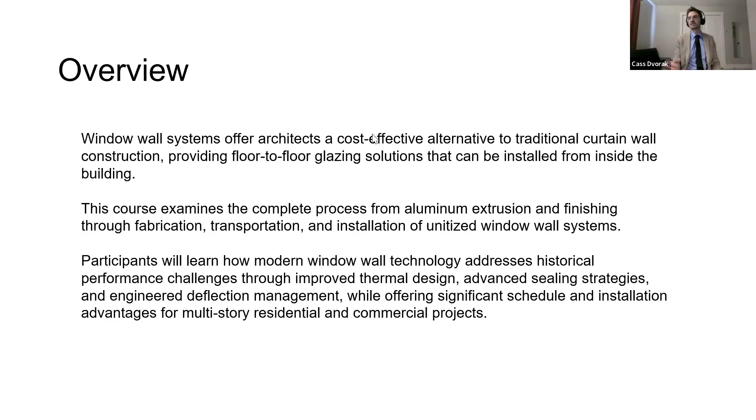In the course, we're going to complete the process. We're going to look at the beginning of the extrusion process right from the start. We're going to look at how it's fabricated, how it's manufactured, all the different processes, finishing options. And then we're going to look at delivery to site and installation instructions, and just generally speaking, giving you guys a nice general knowledge base on modern window wall systems so that you understand what these systems should bring to the table when they're presented to you guys. So let's have a look at that.

These are the learning objectives for today. So right off the bat here, compare installation methods and benefits. We're going to allow Jason to do that when we get to that part of the presentation, but we feel that's very advantageous to the group here to see basically what the options are in terms of how these are going to get installed onto the slabs. We're going to look at how the systems manage water, how it relates to some of the other modern facade systems, and how that is achieved in these systems.

Structural deflection accommodation methods: window wall in the past, and we will get into this later, has been problematic because of deflection accommodation traditionally. So there's been a number of advancements in this area as well that have really allowed these problems to not really be a mainstay of the systems themselves.

And finally, we're going to analyze thermal performance strategies. We're going to look at what drives those thermal performances, how our window walls and some of the other window walls in the modern sense are going to be reacting, and how they can start really comparing to curtain wall and the high-end aluminum systems that are out there that you are likely used to designing with.

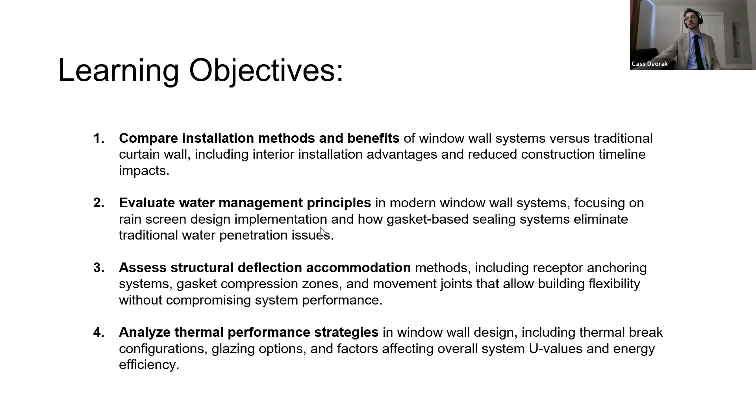Just a little roadmap here so you guys understand where we're going in the next 45 minutes or so. We're going to look at a very easy definition of what is window wall. We find, Jason and I, when we present, one of the first things that everybody wants to know right off the bat, and when I'm dealing with architects, is they're not even sure what window wall is, like what actually separates it from curtain wall. So we're going to look at that. Again, we're going to look at procuring, handling, fabrication, installation. We're going to go through all the phases of the product itself, how it deals with deflection, water performance, advantages,

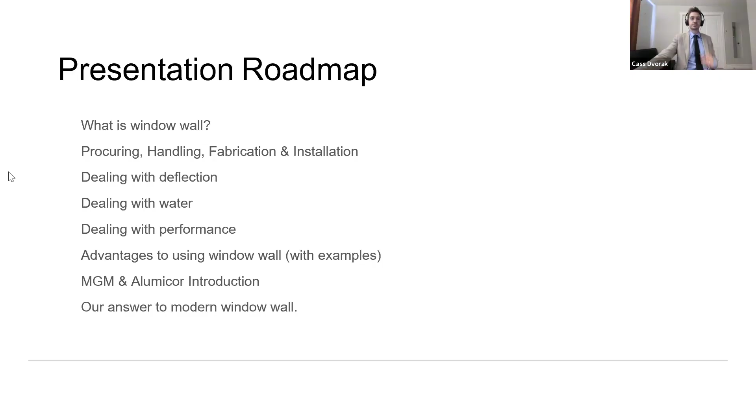So just one moment. Excuse me.

Okay, so right off the bat here, what is window wall? So the best way to define window wall, and I did go to all of the leaders in my own company here, the best way to define window wall is a slab-to-slab application that sits inside the building. So that is the big difference from curtain wall. Typically, curtain wall will sit on the outside of the facade, and window wall is going to go from the top of the slab to the bottom of the slab and sit on the inside, and usually span for most of that level of the building.

And why are we going to use it? Why is it coming up all the time? Why are there groups that are wanting to use window wall? Well, the reduced sound transmission between the floors is really one of the biggest selling points. Because the aluminum's not moving past the floors, there's not going to be any sound transmission like there would be with a curtain wall that would move past the slab. The sound's going to stop at the slab. That's a big selling feature for mixed designs, residential, and what have you, where residents might be worried about that.

It's installed from the inside of the building. So just briefly, in our region, and our regions may be a bit specific, but we were just granted the ability to go up another 10 stories in the city for building permits. So obviously every building is now being redesigned to go up further. And this benefits people that are using window wall, as the cost of equipment and the difficulty and complexity of the job as you're on the outside of the building obviously get worse as it goes up. So being able to stay on the inside of the building is a huge advantage, not only for simplicity, but also cost savings.

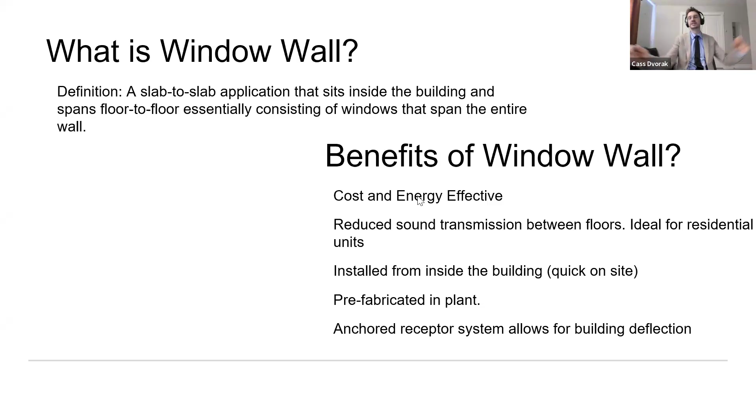So on a project basis, when you're trying to relate cost savings, it's usually cost versus performance, right? We feel that the modern window wall systems have found a way to harmonize those two ideas in a really positive way.

So let's start here, right at the start. This is what it's going to look like before it looks like anything else. It's going to start as an aluminum log. It's going to get cut down into shorter billets. All these pictures have been taken from our facilities in the United States, but just to give you an idea, if you haven't seen the process, on the left side here we have the dies.

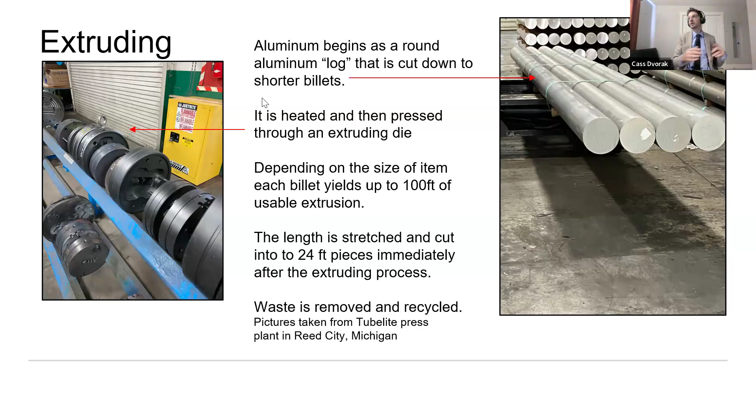These billets are going to get heated up to extreme heats. They're going to get pushed through the die. They're going to come out to about 100 feet, depending on the complexity and the size of the die. And that's essentially where they're going to start. And then from there, typically they'll be sent over to a finishing facility.

This is an anodizing facility specifically, but window wall is typically able to be painted and powder coated, whatever is needed. But typically we see anodizing, right, Jay? Typically anodizing. Yeah. So this is just a brief look at the anodizing process here. It's a naturally occurring electrochemical process. They have to be scrubbed and rinsed in an acid bath.

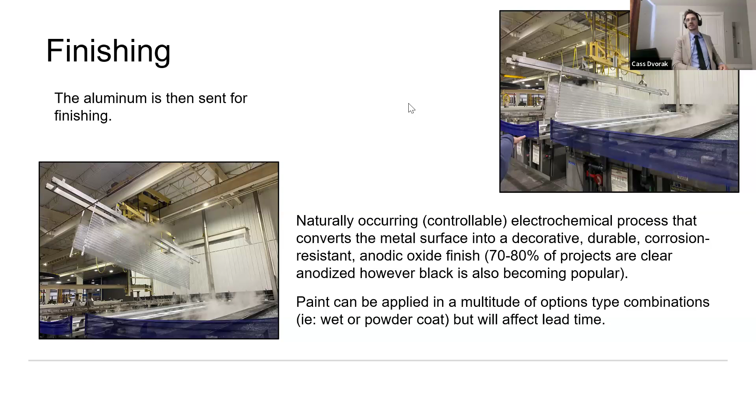And again, we actually have another presentation all about this, so I borrowed some of the slides from it to explain some of this stuff. But the decorative, durable, corrosion resistant feature is very ideal, especially for us since we're on the coast. But really, anywhere you go, anodized still seems to be the main finishing solution for window wall.

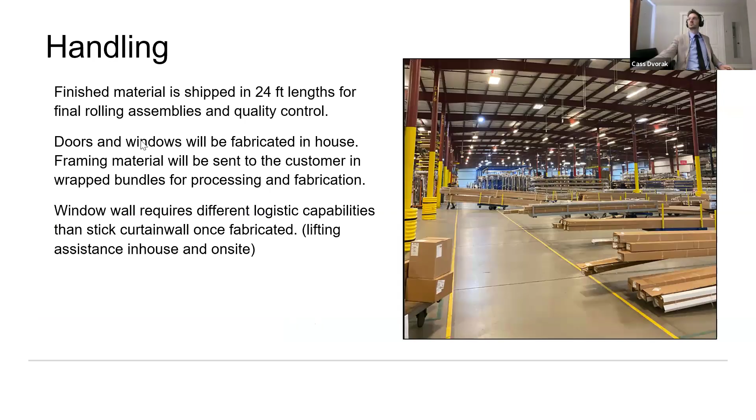Then it's going to get into handling. We've got to send it around to different facilities. They're going to package them up nicely so they don't get scratched, and send it off. And this is where it starts getting a little bit different than curtain wall as it hits the facilities.

These pictures were taken from inside MGM's plant, but typically you're hitting a manufacturing line now. And as you can see, these units are going to be pre-glazed in-house. And that is a big difference. Some unitized systems will be pre-glazed in-house, but that's a big difference that drives the window wall systems. And that presents a couple different opportunities for whoever's working with it to find some solutions.

And essentially the difference is you have to find room for curing and storage; those are the big differences. So once they're glazed, they need to be set aside, untouched for, what is it, Jay, about 2 to 4 days, depending on the type of caulking you're using. Yep. So they're going to be set aside.

And not just that, but for anybody who's ever picked up a frame with glass in it, being pre-glazed, they've probably become about 400 to 800 pounds, depending on the module size, which requires its own new type of logistical handling. Again, different from curtain wall that way. I'm trying to show the differences of window wall and curtain wall, because that seems to be where most people get confused.

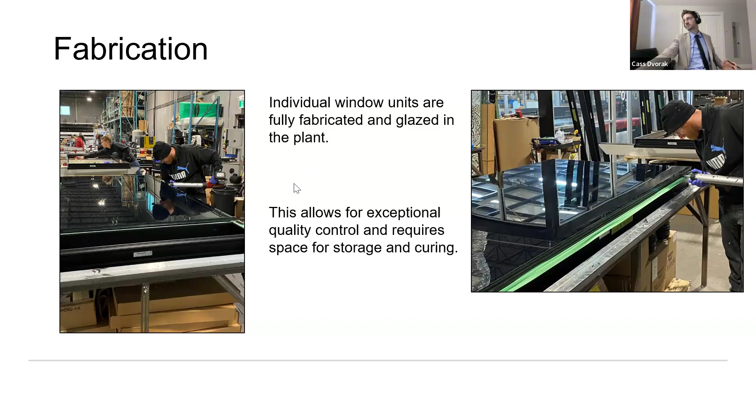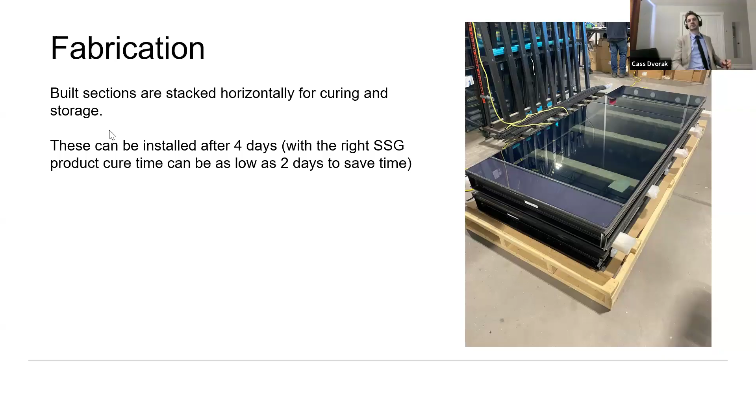So these are going to be a completely pre-glazed and prefabricated module before it goes to site, as you can see here on the tables. They're going to be stacked horizontally, they need to be horizontal, and they're going to cure for a few days. Again, if you use the right SSG product, you can speed that time up and really speed yourself up on site, depending on the requirements. That can be discussed with the contractor for any modern window wall system.

And transportation has to be considered. It is a bit different of a site schedule for this. Typically with a curtain wall system, a lot of it's going to be prepped in the shop and sent to site to be pieced together on site. What you're seeing now with window wall is fully fabricated modules being brought to site.

This is a local site where we installed a version of our modern window wall as well. It's going to show up on a skid. The GCs and site project managers are going to have ways to quickly put these up on the stories. But essentially, the window wall installation is going to follow the building construction vertically, and you can go up before they're done the building.

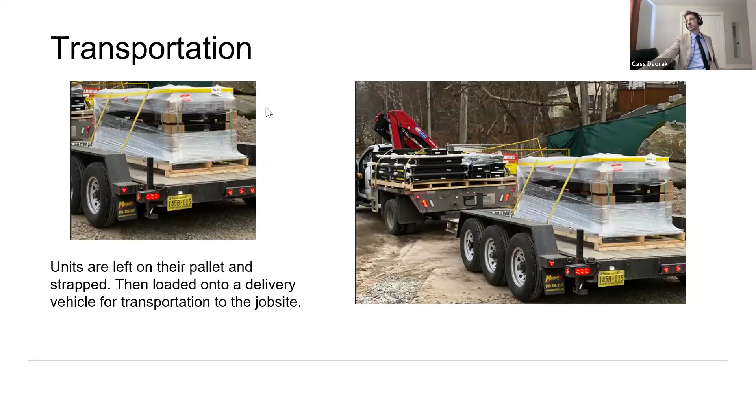So usually it's just a quick coordination with other trades on site to get your product up on top. But once it's there, it's a very quick installation, and that is really where we start seeing advantages to the window wall. Just a quick shot of a telehandler bringing up, and next, that's a floor of window wall modules right there. Probably 2,000 pounds. So again, there's a couple considerations that need to be taken, but once you're in gear, I would say an entire floor could be installed in a day.

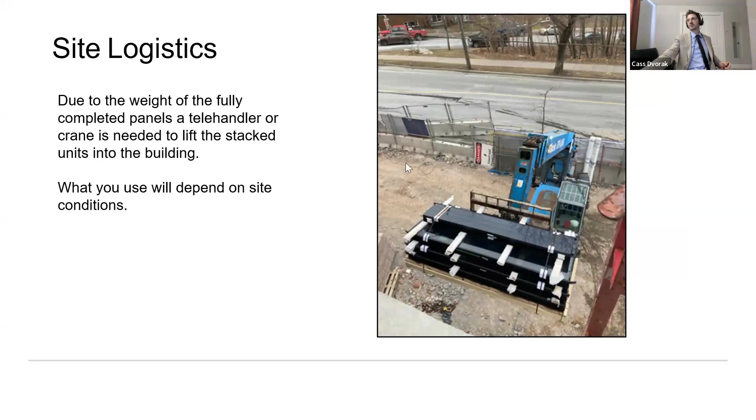Correct me if I'm wrong there, Jason. Yeah, depending on the complexity of the job. Yeah, right on. So I'm going to pass it over to Jason for this. This was one of MGM's sites that we visited frequently and worked very closely together with, and he's going to explain installing the receptors, and then we are going to move on to the slide, but he's going to start with this one. Go ahead, Jay.

Yeah, so what you're seeing here is a receptor system, a sill receptor being installed on top of a curb. We have a curb in this application because there's a patio frame and they had to pour a concrete curb. So we're running along a whole curb, but there's a lot of times where you can be right on the very edge of the slab and you can mount right down to the slab. But the main key point on this is to make sure when you're laying this receptor down that you have all your beds of caulking laid in place and everything's sealed.

It then gets bolted down into the curb, whether it's concrete or wood, whatever your substrate is. You seal off all your penetrations, all your miters and all that stuff. It's like a silicone sealant, like a roll of silicone sheet that you lay down. You lay silicone over top of that. So that's your critical component right there for keeping water out of it. And so you just fully seal that whole receptor frame. And then all your modules just go into it and they stack.

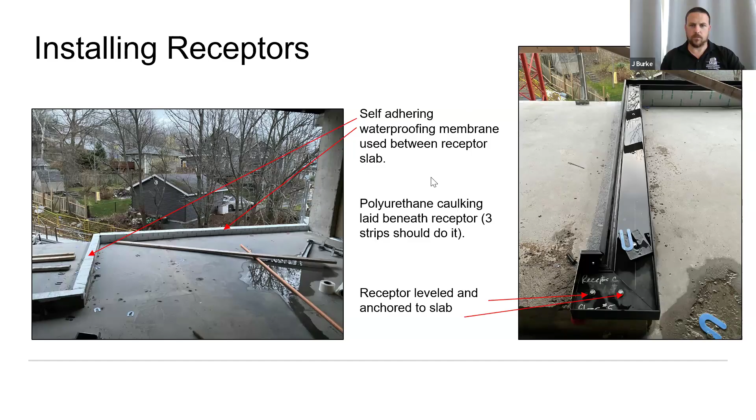Side by side, correct? Correct, yeah, in a linear fashion. Yeah, so essentially the modules just get entered in and then tipped up. I think we have a slide that shows that, so we'll get into it. Next slide is good, Jay? Yep. All right. I am going to let you explain this one as well, because this is definitely more in your wheelhouse. So there's several different anchoring types that you can do.

This one here shows a strap anchor. So there's a groove inside of the head and sill receptor that you can preload all your receptor frames with. And you can bolt that right into the concrete from the outside, so you don't have penetrations right in your sill pan. And then you can space those out as per the engineer specification. So you can put 2 per foot, 4 per foot, or you can just go 1 per foot, however the engineer decides. And then there's 2 other applications you can mount them with. But this one here just shows you the strap anchor and how it goes.

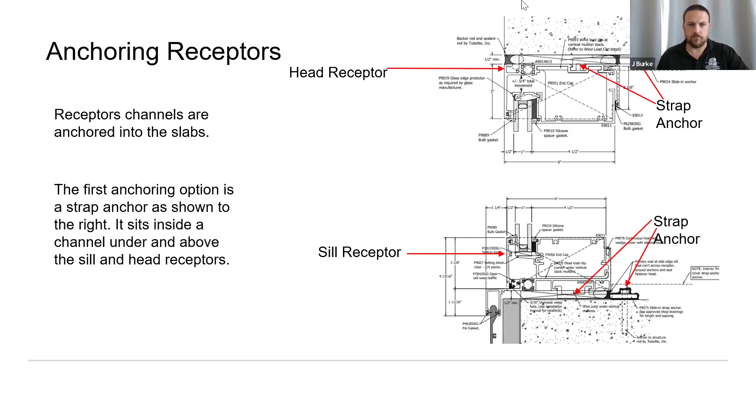Yeah, and we'll look at those other applications. I'd say the strap anchor is probably one of the more common on a bigger job, because even when we're talking about managing deflection, the strap anchor can take some of that deflection as well, maybe if it's side to side. But let's look at the next one. Yeah, horizontal fashion.

So Jason, this is the channel receptor, or the channel. Yeah, you basically have the same thing here, but it's a channel receptor, so that gets mounted down on the concrete slab, and then your sill receptor straddles right over top of that. Then you have no penetrations in your sill there either. And obviously just a simple through bolt anchoring at the bottom for a smaller application if you're not as worried about building deflection. Correct. If you have a concrete slab that's not quite even all the way through, that's typically your best bet, because then you can shim accordingly as you go.

Excellent. And again, as you guys see, the channel anchor here. I'm not sure if you can see my mouse moving on the screen, can you? Yeah. Excellent. So the channel anchor here just fits into the slot, and that can handle a little bit of up and down deflection, and even side to side with it sitting in the channel. There's no break on that going horizontally.

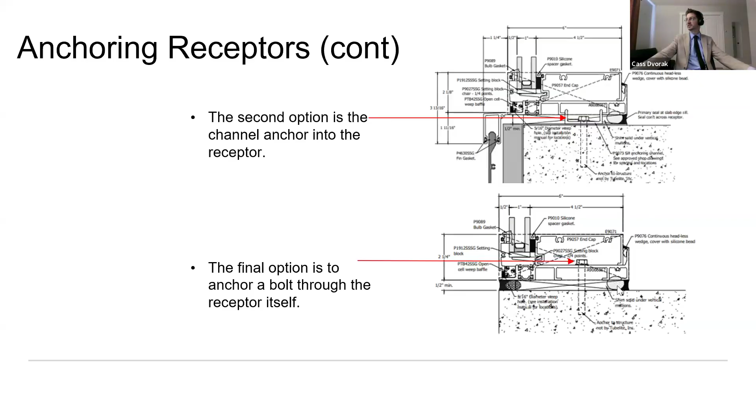So installation here again, just as you can see here, I'm going to let Jason get into this, but I'm just going to explain the picture that we're showing here. So really the most important thing to understand is that you're going to have a head and a sill receptor, as you can see there. The sill receptor on the bottom and the head receptor.

And then what's going to happen is once that channel is laid, the modules are just going to stack in, and they're going to put into the bottom and then lean up. And that's basically what we're explaining here. And then as they're leaned up, there's a drive-on head receptor here. It's just got these shark teeth, and you hammer it in, and that holds everything together after it's set in. So it really allows you to get that strip window feel, but essentially slab to slab, right? Anything to add to that, Jason?

Yeah, and so then you can preload your head receptors as well with the wind load clips. So they're inside of the receptor. Cass, you might be able to put your mouse on it to show. Yep. Yeah. The right wind load clips, the larger, bulkier one towards the back, right above the screw chases. Yeah, so there's a big block there. It's a big aluminum milled out block, and they can get preloaded into your head receptor too.

So again, requirements on the engineering side of things. If you're faced with strong wind loads, a lot of movement, we can preload those. And so basically you have 2 window wall sections, and they're open back module systems. So when you put your first piece in, you can slide one of those wind load clips into that receptor, into that section. And then when you go to put your next section in, slide it into it, it just locks everything all in. And so I think this is a feature. Oh, sorry, go on, Jay. My bad. Yeah, sorry. So that drive-on piece there would be no way that could back off.

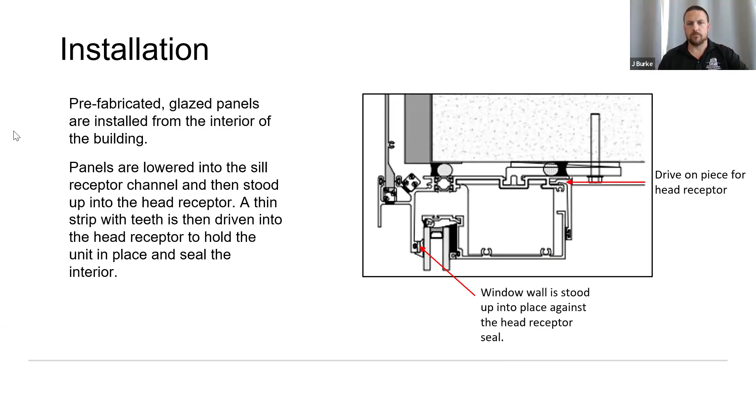Excellent. And yeah, this is what you should be looking for on a modern window wall system is the type of sealing like this, using a gasket built sealing, and we'll get again coming up to that and why that's so important. But to stay on the vein of installation here, what do we do at the slab edge? And that is a good question, and that is another thing that separates, I would say, window wall from a punched window system or a ribbon wall system, or a curtain wall for that matter.

What we're going to have here is a slab edge cover essentially, and this is part of the receptor. This is a rolled component part of the receptor, and it just comes down and hangs over the slab. And this is a part of the head receptor, so sill receptor, head receptor, from covering the slab. And then from there, what we do in-house is we have an option for just an aluminum slab cover essentially. But there are options to install ACM paneling, I believe, spandrel glass, as you can see in the example given here at MGM's job site.

And any modern window wall system is going to allow this, and it should be really allowing for any kind of filler product to be used over top of the slab. But that is how the slab is handled, as you can see here. Moving up, the spandrel glass is going to be installed, and then you're just going to move up on the frame. Anything to add to that, Jason? No. Okay, right on.

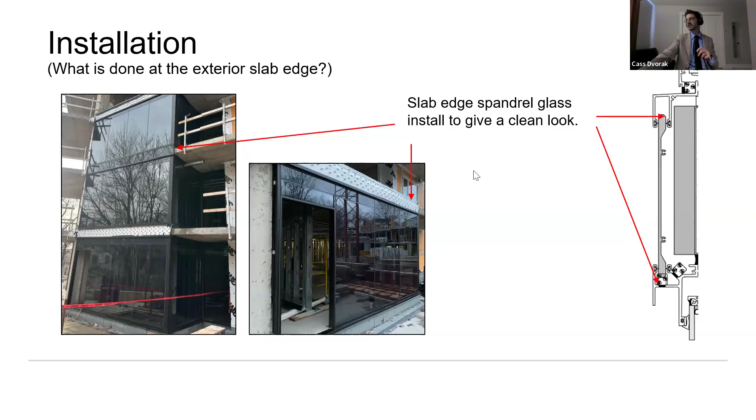So yeah, we're going to look at how these modern window wall systems are going to allow for deflection. Now, typically speaking, back in the day, when window wall first became a thing, the horror stories that I heard from it was that essentially they were only sealed using caulking, wet seal. And that obviously, especially on the larger buildings, as they move and deflect, and not even over a lot of time, that obviously caused leaks.

So what the modern systems have gone and done is essentially move to an entire gasketed system, so the system itself can move and adjust, and the gaskets can handle the movement without breaking the sealing and the caulking. As you can see here, we're just pointing to all of the gaskets that have been added to the system, where maybe traditionally they would have been a wet seal.

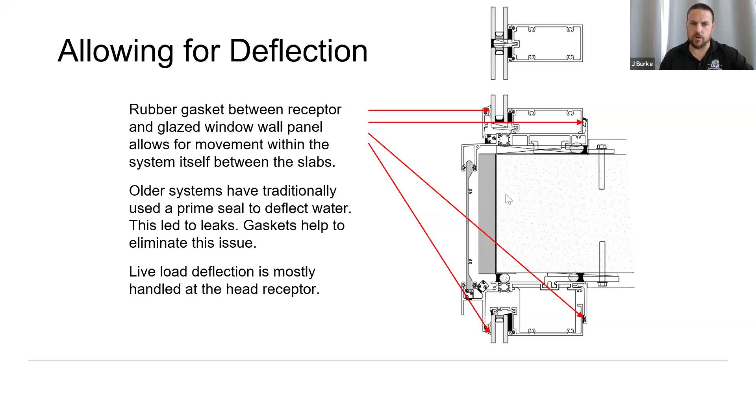However, live load deflection is mostly handled at the head receptor. That's where you're going to leave most of your tolerance for construction. As you can see in here, there's a lot of room left in this cavity. Anything to add to that, Jason? Yeah, they leave a 3/4 inch space between the top of your frame module and the inside of your receptor. So each floor has 3/4 of an inch of movement available there, either way. Along with whatever tolerance is granted in the anchoring system. Yeah, so your story creep and your concrete shrinkage over time should never exceed that amount. Excellent.

So that's vertical deflection, but horizontal deflection we've also had to take into account. So we're looking at our system here just as an example, which is an SSG system. But typically in the system, what we've done here is a vertical diverter gasket. So this is a very heavy duty proprietary gasket that sits between the modules, and it essentially acts almost as a curtain wall throat.

But as you can see, it can be used in a couple different applications there, and it can even be capped to mimic that look. But ideally speaking, this example is an SSG, and as you can see, that gasket is just a big, high quality rubber chunk. And as that system deflects horizontally, that vertical gasket is going to absorb that deflection between each module as well.

Jason, do you want to speak to this a little bit?

It's just talking about deflection being handled in the strap anchor system and in the channel system, going along with what we discussed earlier. Yeah, there's another point we can touch on with the details here. Your anchoring is going to be determined by how far your system has to stick out past your slab. The front bull nose of a floor slab has an insulation. You can see it's in the gray there. Typically, you see about a 1 inch thick insulation. So you want your window system to come out past that.

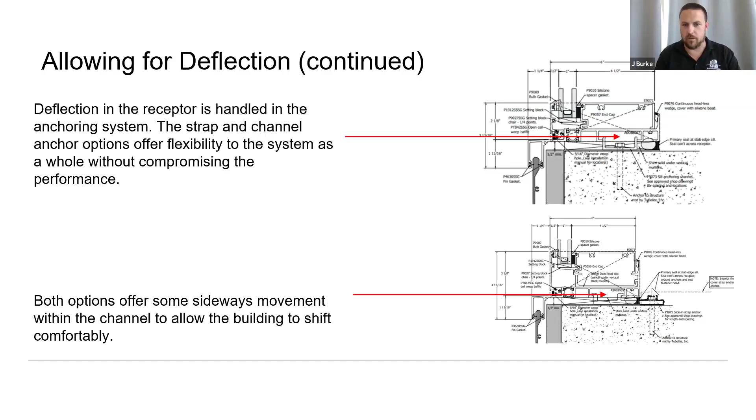So in terms of the deflection on it, as we alluded to earlier, that system can move in a linear fashion if it needs to over time. Thermal expansion and the movement of the building, it absorbs it vertically and horizontally. And that's such a great point to add, Jason, just in terms of, I think a typical modern window wall system is going to want to give you options on how it can be installed, how it can be mounted, because every project's different, right?

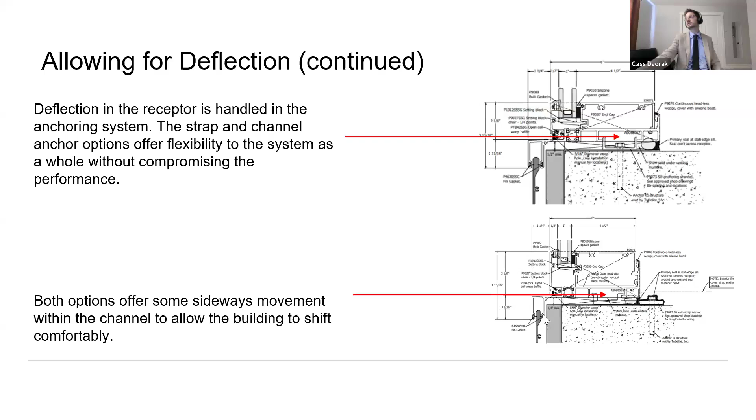We always have our standard details, but everybody in this presentation knows that every project's going to have an anomaly. It's always going to have a detail that doesn't make sense. And ideally speaking, I think a modern window wall system should allow designers the tools to get around these types of things. Yes. So we're going to look at one of the main advantages of this.

I touched on this earlier, but especially in the bigger markets with the taller buildings, this is an effective installation system because of what you're seeing in this picture. The building schedule allows the product to be installed following the installation of the vertical stories going upwards. Just one moment. Sorry.

And specifically for highly repetitive projects, this is where our window wall system is going to be your best friend. Something that can be repeated in-house. You can take advantage of the in-house quality, the in-house control. It's a good point that typical details and repeated details are always faster and easier to quality control when you're fabricating in-house. So with a system like this, the more typical details, the better, as really what you're doing is speeding up fabrication. And as it goes to site, it can just follow that building.

So it really does change the schedule of the building installation, it can speed it up, but the people on the project management team are going to have to be aware that this is the product being used, because it's going to require the glazing contractor to be on site at a different schedule, right, Jay?

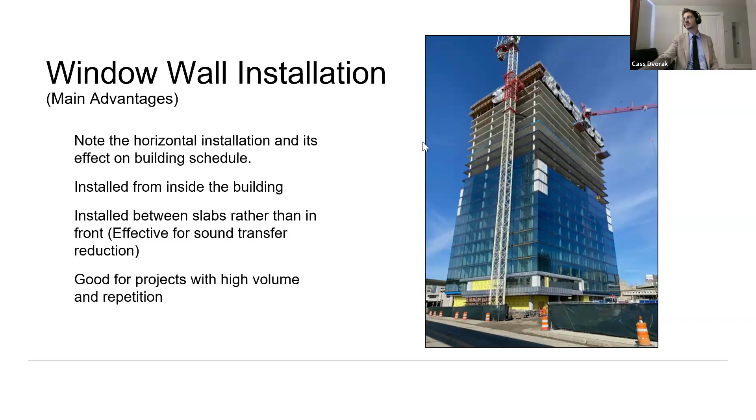It's very advantageous. Yes. So now we're going to look at how to keep the water out. That is the big question with window wall. These systems used to leak. Why don't they anymore? So essentially we touched on it with regards to the prime seals versus the gaskets. Old systems only relied on prime seals, so that is really primarily where you saw the leaks. But how do you implement a gasket system that actually stops the leaks? And we're going to look at that.

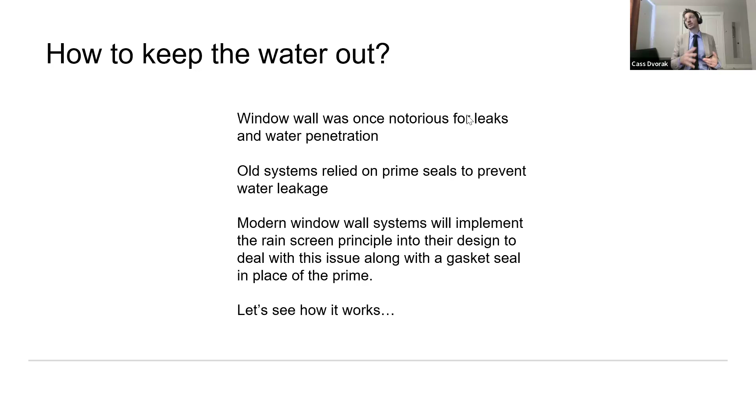But really what you want to do is implement the rain screen principle. It's a rain screen design that's going to be present on any high-end curtain wall system, on any high-end ribbon window system. Really, any high-end building facade system in 2025 should have a rain screen system that's built in. Essentially, it's the idea that you keep a cavity between the outside and the inside of the building with an internal seal separating the pressure, and then the pressure in the cavity will match the outside pressure.

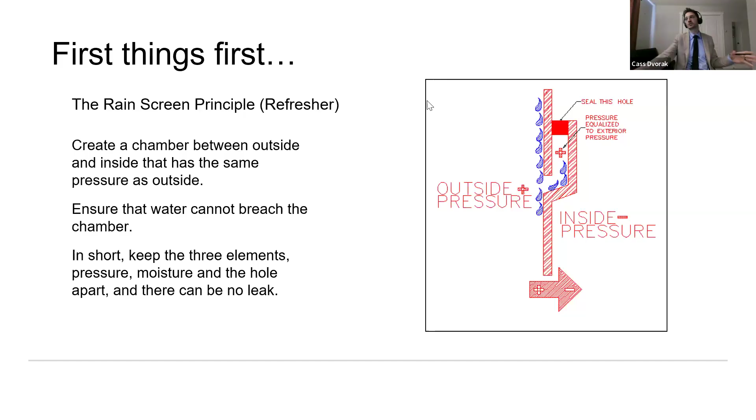So any water that manages to get into a window wall system should effectively be wept out the bottom, and we'll show you what that looks like. It is the same principle as a curtain wall weeping system. As you see here, the pressure cavity remains, the seal is on the inside, nothing's going to get through. Water is always going to work its way into this area of the system, but it's just going to wind up here and filter out the weep hole. This is a weeping cell baffle, just to make sure debris doesn't get into that hole and plug it up. And you see the same thing going on at the bottom here.

Anything to add to this, Jay? And also here at the slab. No, I think it's pretty good. If anything behind your slab edge cover, it also weeps out through the top of the head receptor as well. Yeah. So I think the issue of water penetration has largely been solved in modern curtain wall systems, and in the last 5-10 years it has been solved in modern window wall systems as well. And this is how. It's essentially the same idea, just implementing the same principles with a slightly different build system, right?

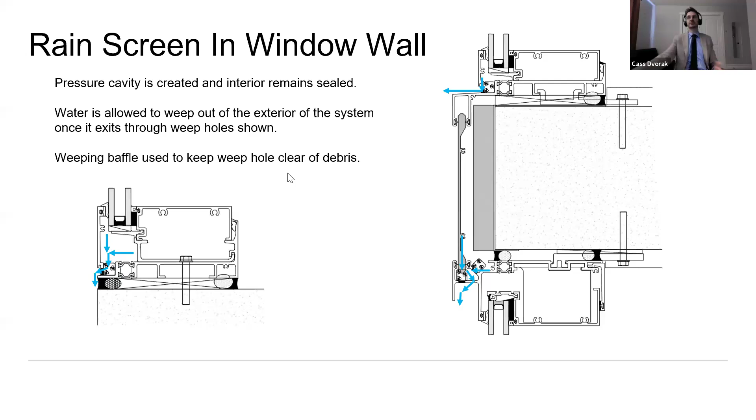Right. Then we'll look at thermal performance. This is becoming really important in Canada. Our building codes just changed, I think, 3 months ago. And we've actually been dealing with this with window wall already, in a positive way. People are now looking for high performance thermal systems. The old systems primarily used even 30 years ago, especially in certain markets in Canada, I wouldn't say they're getting phased out, but they're becoming more strict on how they're allowed to be used. The system itself is usually as good as its infill, but it still needs to have a tight rating.

If a window wall system isn't hitting the same thermal performance standards as a high-end curtain wall system, I would say that any market, at least north of the American border, is going to be tough. So these are important things for people like Jason and I, because we have to deal with this all the time. So what are the factors that are going to affect that?

On commercial buildings, it's largely what's happening inside the building, so that's got to be looked at. Is it residents? Are there going to be people cooking inside? Are there machines operating inside? What's going on inside this building needs to be considered and, depending on the size of the project, given to one of our engineers or an engineer, so that can be worked out and make sure that there's no issues.

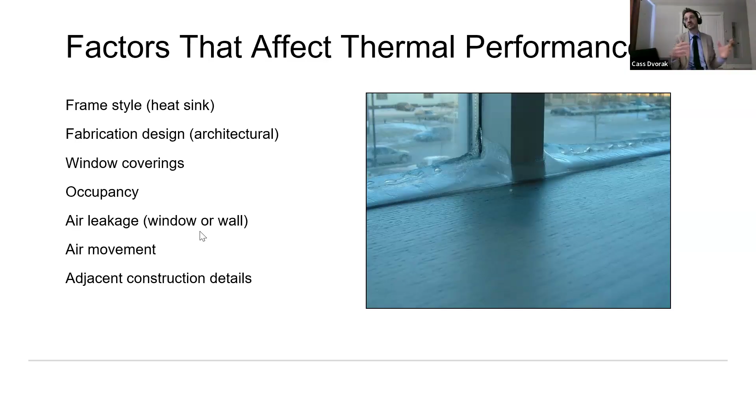Adjacent construction details. If there's another type of product being used in the project, all of that needs to be considered. But modern window wall systems should be able to integrate new products. That is another extremely important feature of these systems. So let's look at how these new systems are performing. A modern window wall system should be performing with a double glazed application up to about 0.3.

That is about where the most strict Canadian construction codes are putting thermal performance, and that keeps designers away from having to design with a triple glaze in mind, because on a 40, 50, 60 story building, the costs on a triple glazed building can become exorbitant. So what you're trying to do is still hit all of the thermal benchmarks you need to hit while keeping costs under control. And this is how we do it.

And it's essentially a very similar way to how we do it with curtain wall. This is how it should be done, a strutted thermal break, polyamide thermal break. I think there are still a few systems out there that are pour and debridge thermal break. There are probably a few systems out there that aren't thermally broken, or with a very old foam receptor thermal break, similar to some of the old curtain wall systems. But ideally speaking, the thermal break is going to be in the receptor system.

So this receptor base is two pieces, and they're rolled together using these polyamide strutted thermal breaks. And a polyamide strutted thermal break is really what all of the high-end facade systems are using. You can get a little bit crazier and go with fiberglass or something like that, but that's not necessary yet in any of these climates. But really to hit these building code standards, typically speaking, you're going to need a dual strutted thermal barrier at the very least to meet thermal codes.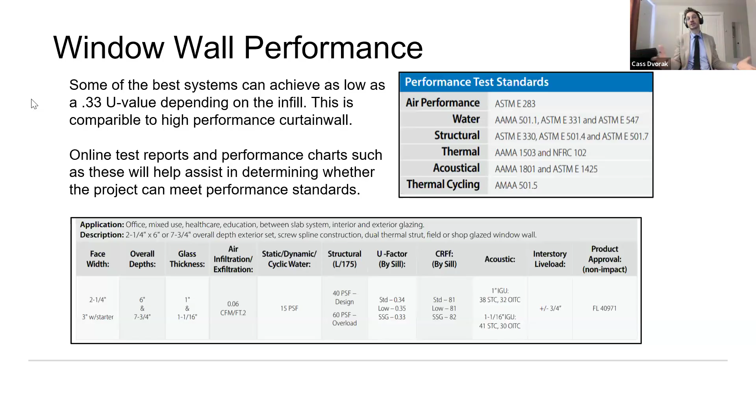But yeah, looking at the advantages of the newer systems that are coming out, the biggest advantage that we found that people react to the best are the cost savings. And where you're going to see the cost savings aren't necessarily on the material. The owner of the building is going to see the cost savings on the ability to install from the inside of the structure. They're going to see the cost savings as the building becomes larger, and when the design is kept to a repetitive design. So these are all factors when designing with window wall that should be taken into consideration.

I think it's a natural reaction to want to get very design centered. But if there are ways in the design stage to save potentially millions of dollars, which some of these could, then I'd say these window wall systems actually offer potentially more solutions for the issues that you're running into more and more these days.

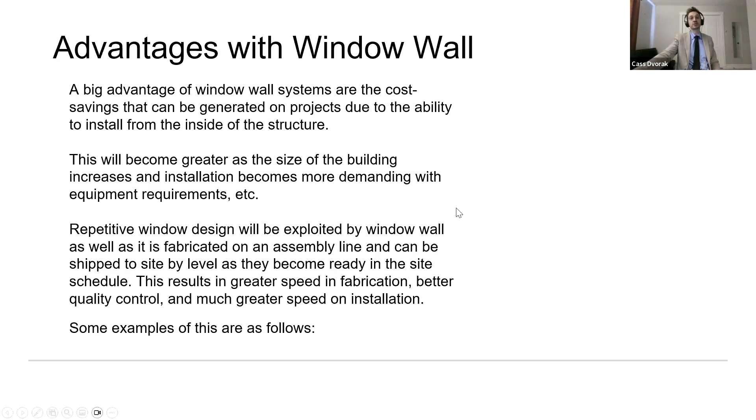2025, I know in our region, we're running into labor problems in the city. We're running into difficulty finding large crews. And this is a very friendly system for that because of these reasons. They're quick on site. They're installed from the inside of the building. And most of your work is being done in-house in a controlled environment. You don't need a large crew to do this type of thing. So these systems are getting much better and much more advantageous for groups to work with and less risky. That's probably the most important part, they are performing and behaving much more like a robust curtain wall system now.

So that does conclude the educational portion of the presentation. Keep your questions just for one more second. I am going to get into the final part of this and just give you guys an idea of who we are, and we'll keep it brief, don't worry. And then you guys can pick our brains and ask us as many technical questions as you'd like.

So I just want to make a brief introduction of the partnership between MGM and Alumicor. We've been partners for a few years here in Halifax now. Once upon a time, Alumicor had a plant here, and we don't anymore. And MGM then built a plant and took over distribution. Jason actually used to work for Alumicor and Tubelite once upon a time. So that's why he's so knowledgeable about our systems. And we worked together actually at the time. So it is a symbiotic relationship.

And what we've tried to do as a group and as a partnership is offer to our customers, but more importantly to you guys, to the design community, the access to MGM and Alumicor's and Tubelite's engineering and design resources. That is where MGM and Alumicor have put most of their resources, I think, and they've put a heavy emphasis on assisting the design community. And I think that's what sets Alumicor as a supplier apart from the other suppliers in Canada and Tubelite in the United States, is their dedication to the engineering side.

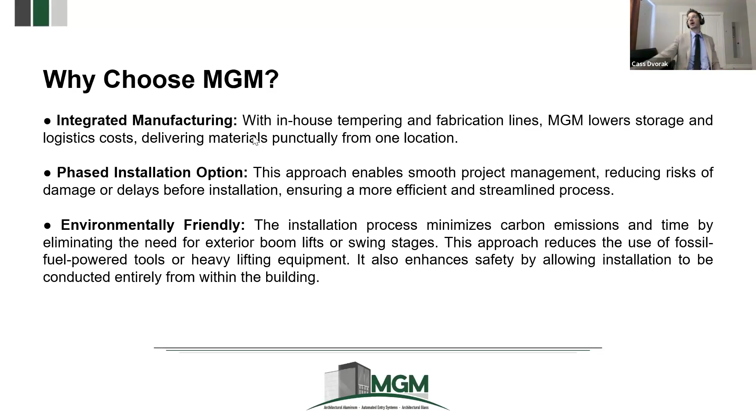Just to give you a brief glimpse of what we were showing you, kind of examples of this in the presentation. This is Alumicor and MGM's, I would say, answer to North America's need for high-end performance window wall systems. Said it earlier, that Tubelite 950 SG window wall system. It's a newer system. I think it's about 5 years old, and it just came to Canada about a year or two years ago with MGM. They've done a few projects with it now, and it's been fantastic. It is an excellent product.

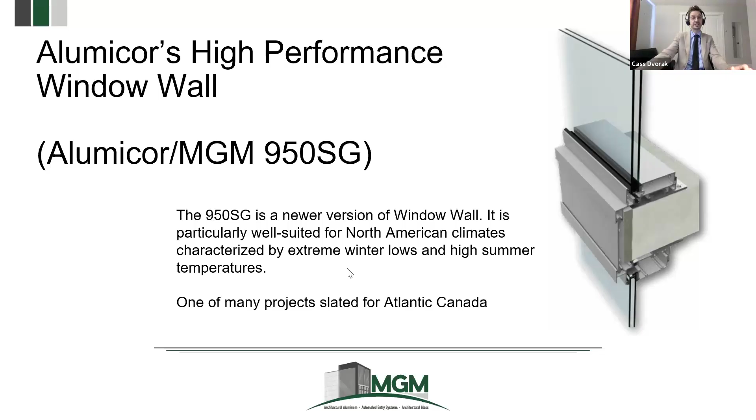It's a beefy, heavy product for our northern climate. I think typically with a lot of window wall systems, you see a thinner gauge, you see a little bit more of a ribbon window system. This is a beefy system. Anybody who's been up in Canada, or for any of our architects in Canada, you'll understand why that concerns us as well, or even in Minnesota or any of the other colder states, right?

And you might recognize some of these products from our catalogs in the States or from our catalogs in Canada. But with our window wall systems, with that 950 SG, all of our high-end architecturally rated thermal products are easily integratable. They retain their architectural rating. That is great for high buildings over 40 stories that require architecturally rated products. We have architecturally rated punch window, terrace doors, as you see, architecturally rated commercial windows even, and the phantom vents, and obviously the more specialty products that hide the lines and hide the doors and the windows and everything.

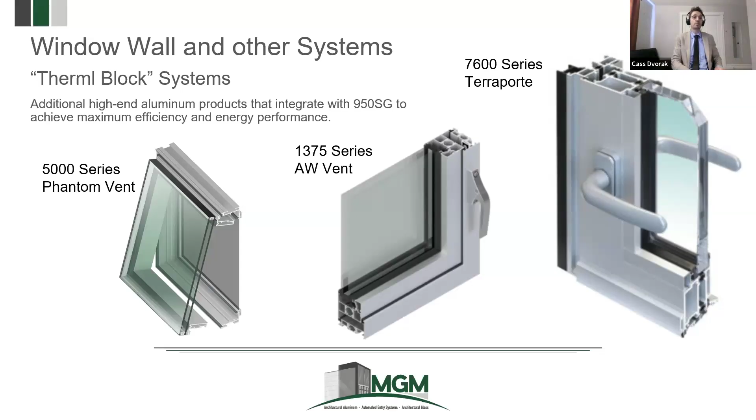So really, the one-stop shop option and philosophy has been our philosophy as a group and as a partnership, and we're just expanding that with presentations like this, where we're really trying to clarify what window wall is, get people interested in window wall, and then get them maybe asking us questions about what a modern window wall system can do for a project that they're looking at, and we'd be hoping to jump in and help you guys out with that kind of question. So thank you, and we'll be very willing to take any questions that anybody has right now.

Amazing. Thank you, Cass. I hope that was helpful. Yeah. Yes, that was perfect. All right, let's jump into these questions here.

First question is, how are field condition tolerances accounted for? Jason, I'm going to let you answer that. Field tolerance conditions. We're talking about different substrates, I assume. Given that you have different substrates like concrete, wood, all that good stuff. Basically, you just design your receptor systems to be compatible with that. You can do different strap anchors like we showed earlier. You can do different shimming. You can use no strap anchor. You can just bolt right down through it. I'm assuming that's where the question came from, but there's multiple different anchorings that you can use for every different substrate.

And that's a good point, Jason. Just because you chose an anchoring system at the beginning doesn't mean if you get to site and you find a condition that maybe doesn't allow that, or you find a condition that can be improved by using those, it's not like you need a new receptor for those anchoring systems. They can be adjusted on site, so you can move between those options post order. So that is another good thing to say. There are options, ways to handle those types of site conditions without having to redesign or reorder the entire system. We've run into plenty of them ourselves.

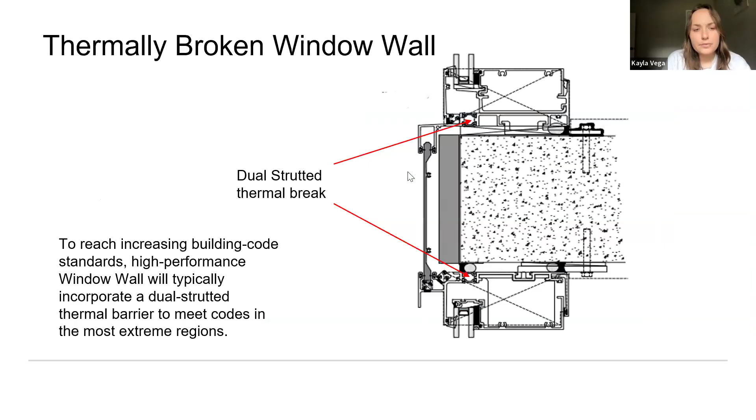Okay. Looks like we have one more question. Looks like this person's saying they didn't understand the detail where individual window units meet side by side. It's a butt joint with a silicone seal. You didn't show a plan view of this joint. Let's see if I can find it here. This one, I think he was talking about. Oh, is he talking about the outside joint?

I'm not sure. Sorry, can you just read it again, now that I have the picture in front of me? Yeah, it says they didn't understand the detail where the individual window units meet side by side. It is a butt joint with a silicone seal, question mark. Well, that's a proprietary gasket there. Jason, if you want to explain that, but when they meet side by side, it's not a sealant. It's the vertical gasket that separates them.

Yeah, each jamb of every window section has an open back module mullion, and they're male and female, and they snap together as you progress down the building. Okay, gotcha. Similar to a strip window system that way. Or a unitized system. Coupler mullions, more or less. Okay, thanks for clarifying there. Excellent. And it looks like that's the last question for now.